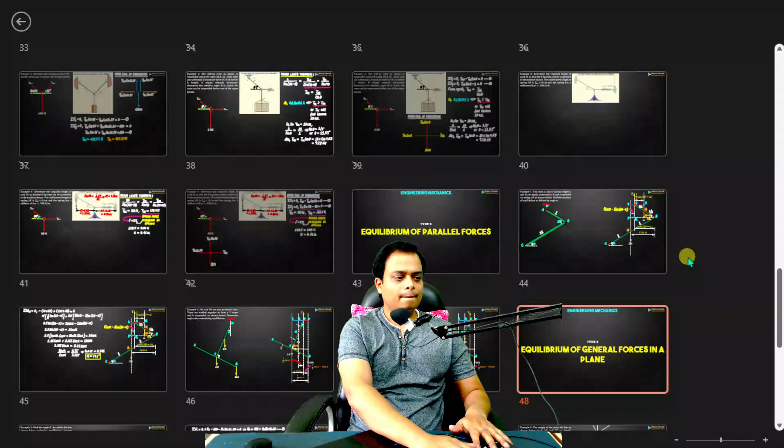All set? Here we go.

Today's session is going to be all about discussing problems that have appeared in Indian universities in the last decade or so. This is going to be very important for you if you happen to be a first year engineering student and if you have this course of engineering mechanics. So, welcome to the world of statics. And today we'll be discussing problems based on general case of forces in a plane.

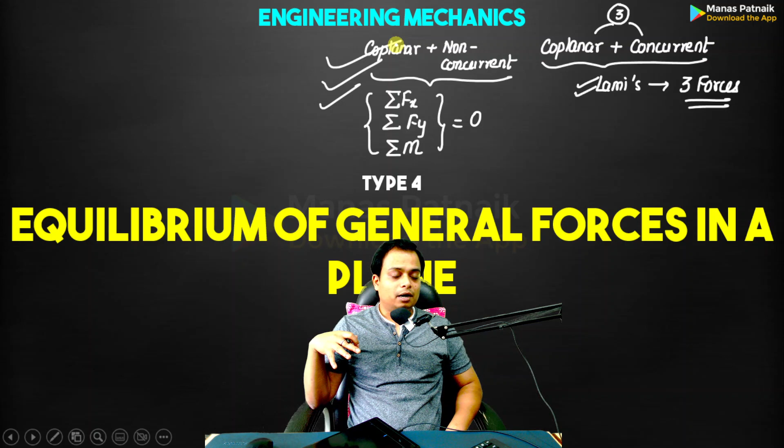So it is my responsibility today to explain and demonstrate how all of these things can be applied in the best possible way. What you need to know is how to create free body diagrams, and even that I'll be explaining in detail. So here we go with problem number 1. Watch this. This is going to be interesting. Take a look. Find the angle theta for which the bar shown below maintains equilibrium.

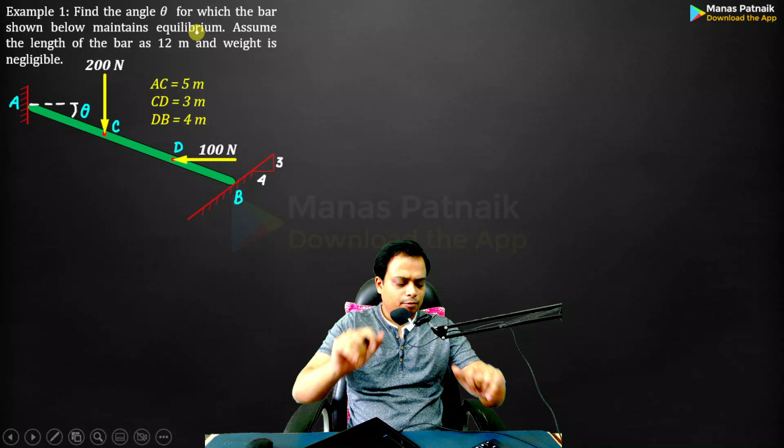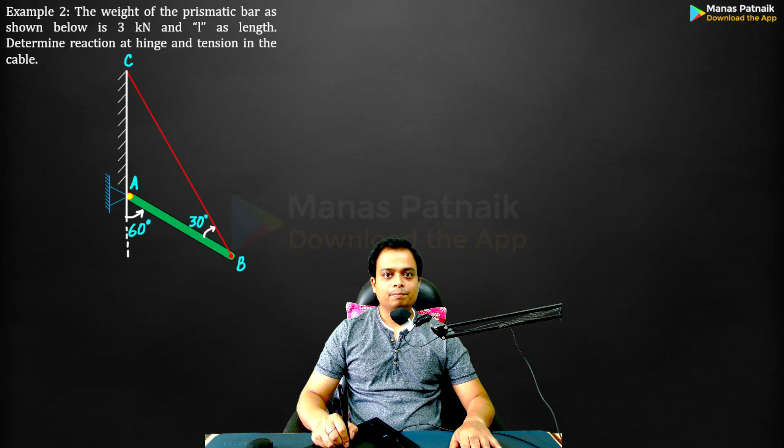And one sec, let me just show you the problems that we'll be discussing in today's session. This is problem number 1. Then we'll be discussing this problem over here. Take a look. Very interesting. And then we are going to take a look at this problem. All of these problems are such that we'll be applying the equations of equilibrium and we'll be trying to work out the value of unknown forces such as tension in this case. So watch this video right till the end. This is going to be very, very interesting.

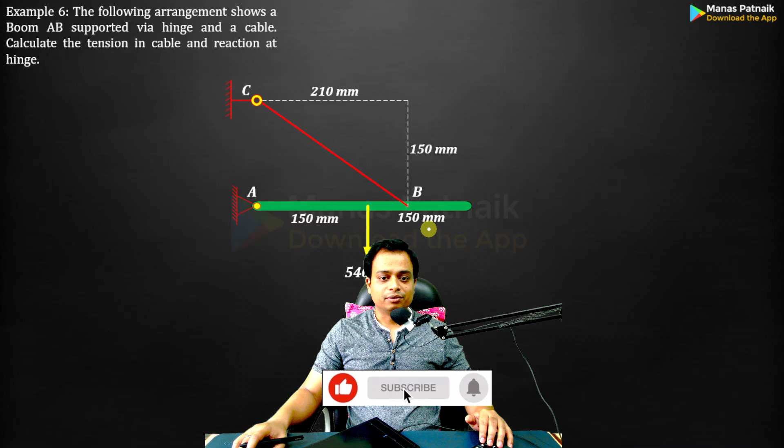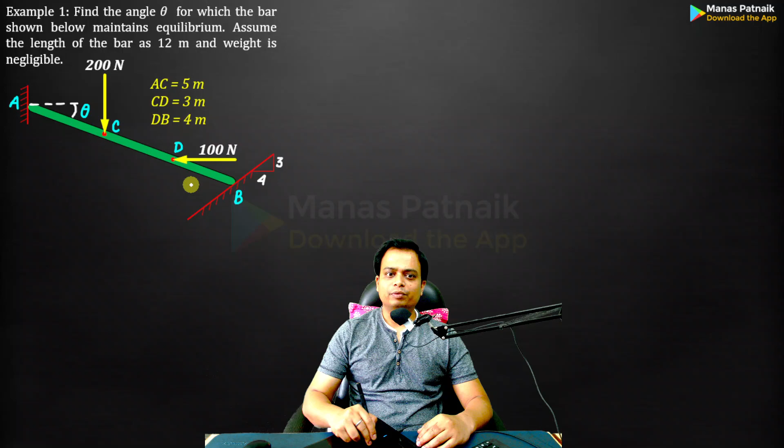Let me start with problem number 1. Take a look. Find the angle theta for which the bar shown below maintains equilibrium. Assume the length of the bar is 12 and weight is negligible. There is no weight. The length of the bar is 12. And if I can just zoom in, all of these segments of the bar, like AC, its length has been given to us. CD is 3, DB happens to be 4. So all the dimensions have been given.

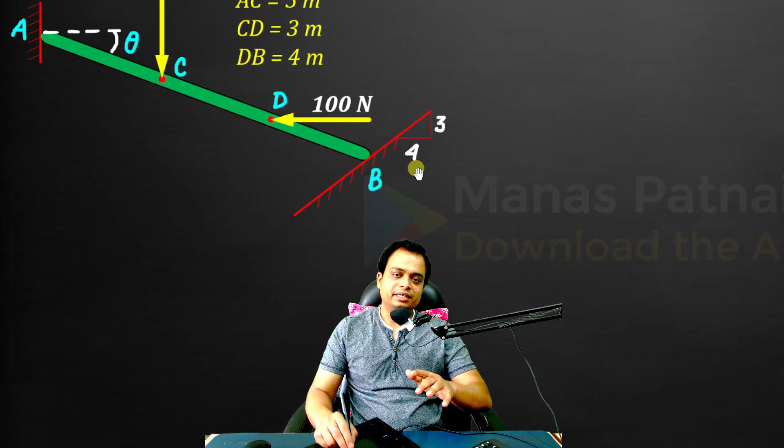Even this inclined surface over here, the angle of the incline is something that you can work out with the help of this triangle. So tan theta is equal to 3/4. Just do the inverse, you'll get the angle. It's very simple. Now let me start by making the free body diagram. Here it is. These are all my reference lines. Nothing fancy. The first thing, students, that you can do, you can simply take a look at this triangle.

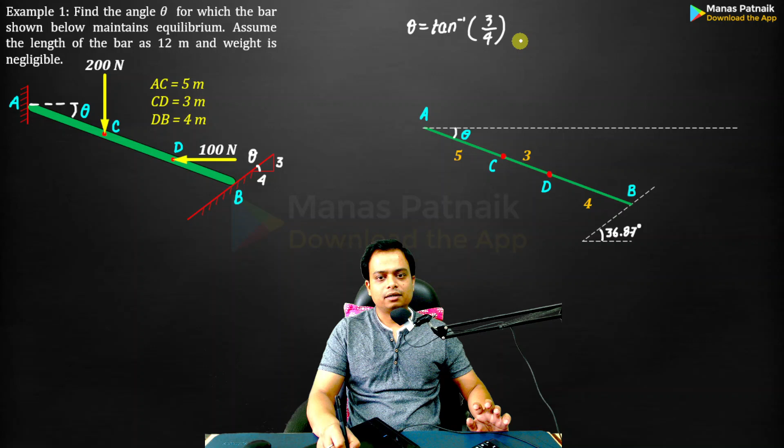If I say that this angle is theta, let me zoom in again. If this angle is theta, tan theta will be equal to 3/4. That means theta will be tan inverse 3/4. And the value of theta you will get over here is 36.87. Theta equals tan inverse 3/4. Done. This is the result that I have written. If this angle is theta, then this angle also is going to be theta.

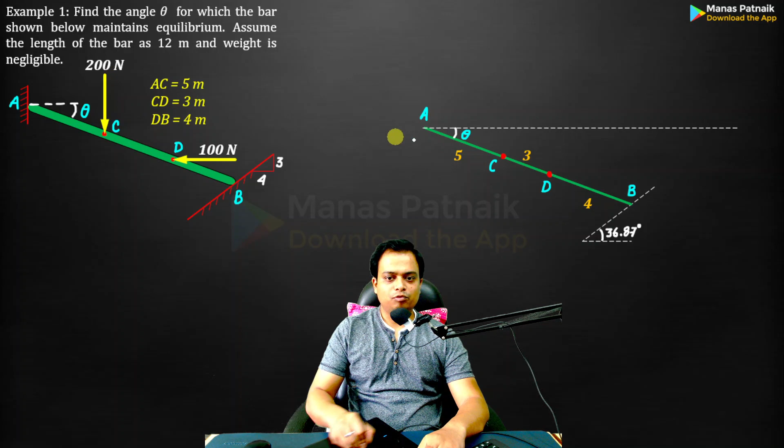Now you know the math. Secondly, there is this 200 Newton force over here. Then you've got 100 Newton force horizontal towards the left hand side over here. Done. All forces? No. If you remove these supports, then only you are making the free body diagram.

So perpendicular or normal to the surface, you'll have a reaction at A. Normal to the surface, you'll have a reaction at B this way. Okay, so if it is making an angle of 36 degrees approximately over here, then if this happens to be the normal, and if this is the vertical, the angle between normal and vertical will also be 36 degrees, 36.87 to be very precise. Simple concepts that we had discussed in the previous session.

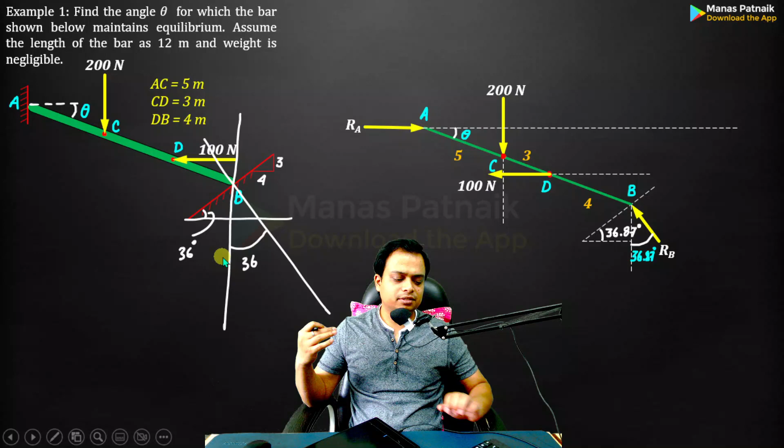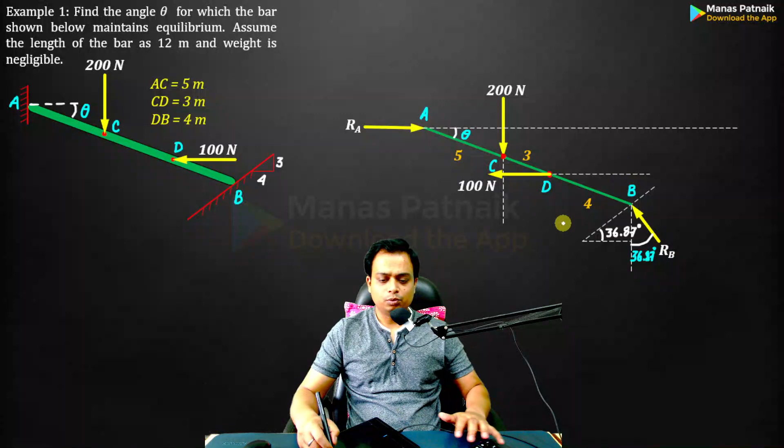Okay, watch this. This is going to be very, very interesting. Now comes the point where I'll be simply resolving the force of RB into components. So if you watch, we zoom in slightly. If you watch, this RB can be resolved into RB cos 36.87 and RB sine 36.87, isn't it? Yes, sir, we can do that. So do it. Here we go. RB cos and RB sine.

Done. Now comes the time where we'll be applying the equations of equilibrium. You can apply the equations of equilibrium anytime. Okay. Fx = 0, Fy = 0, moment = 0. Right? So if you are slightly not confident with Lami's theorem, go ahead and use this technique. This is going to be very helpful.

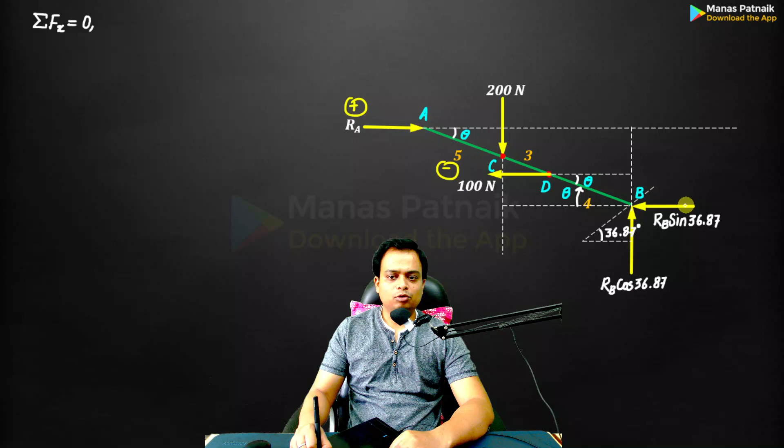Now let's start with summation Fx = 0. So sir, there is this Ra which is to the right. So take it as positive. Okay, sir. 100 is to the left. Take it as negative. Okay, sir. RB sine 36.87. This is also to the left, sir. So take it as negative again. Okay. So let me write them. Plus Ra minus 100 minus RB sine 36.87. So this is our equation number 1.

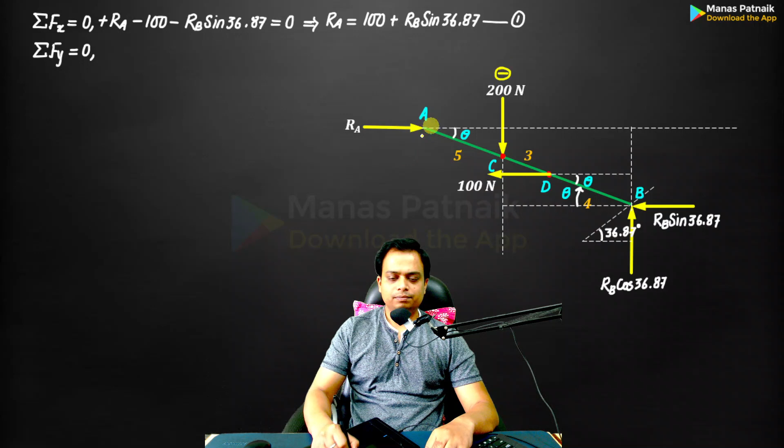Okay. And you can see that there is one equation and two unknowns. Ra and RB are the unknowns. We cannot proceed. Now let's apply another equation. This is summation Fy equals to 0. If you watch carefully, this 200 Newton is downwards, negative. This is upwards, positive. These are the only two forces in the y direction. One of them is positive while the other is negative. You simply write negative 200 plus RB cos 36.87.

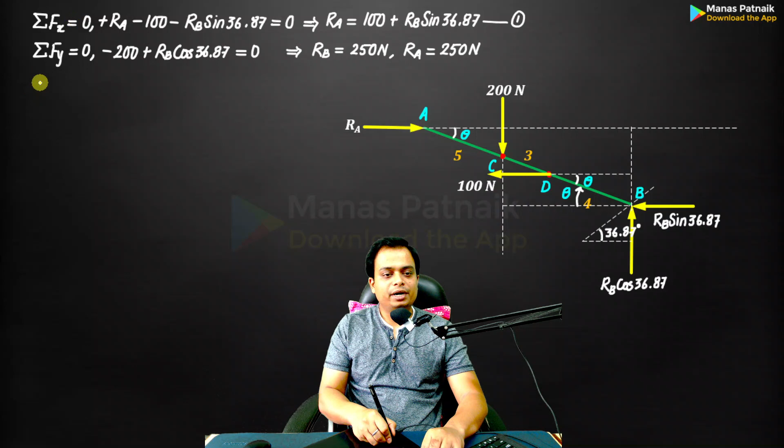Done. Solve for RB. This is what you get. Very simple. And once you have the value of RB as 250, you can put it over here and get the value of Ra. Simple math. Now, so what shall we do? Now you should go for the last equation of equilibrium, called the moment equation equal to 0. Now, which point shall I take the moment about? Should I choose A? Should I choose C? Should I choose D or B?

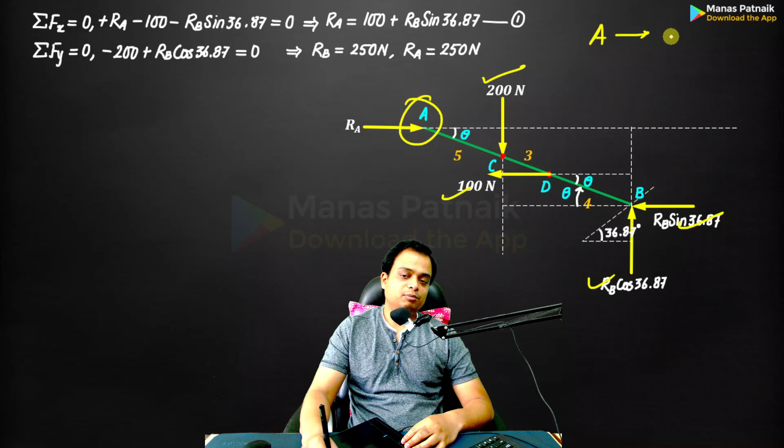First of all, let me start with point A. If you take the moment about point A, you don't have to worry about Ra because Ra is actually passing through A, and hence you cannot drop a perpendicular on it. Its moment is going to be 0. When you take the moment about A, you have to deal with 1, 2, 3 and 4 forces. Right. This is a small practice that you should always do before choosing the point for moment. Okay, so A has got 4.

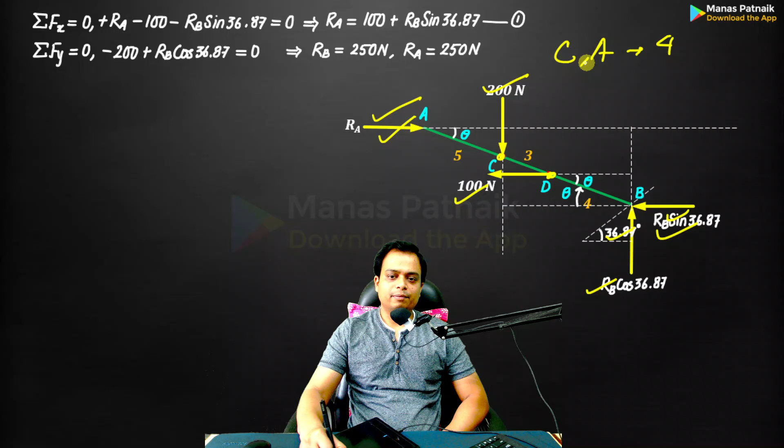If you choose the moment about C, again 200 Newton force is out of the picture, you have to deal with 1, 2, 3 and 4. So C also has 4 forces. What about D? If you talk about D, this 100 Newton force is out of the picture, but you have Ra and 200. You also have RB cos. You also have RB sine. Again, D also falls in the same category where you have to deal with as many as 4 forces.

Okay, but when you take the moment about B, these 2 forces are out of the picture because they pass through B. You can't drop a perpendicular on them, therefore their moments are 0. And here you are left with only 3 forces, 100, 200 and this Ra. So the best option that we have is point B, and we are going to take the moment about point B equal to 0. How to take the moments? This is something I have found students confused about.

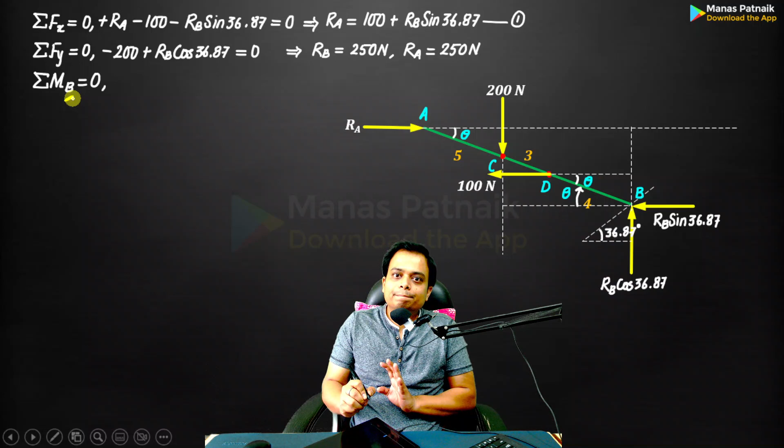Okay, so whenever you want to take the moment, you always should draw the line of action of the force and then drop the perpendicular from the respective point. The point in this case is point B. Let's say we want to take the moment of 100 Newton force. Just watch.

So this is going to be the line of action of 100 Newton force. From where are you taking the moment? Sir, we are taking the moment about point B. Watch this, this is very interesting. So drop a perpendicular from B. This is the perpendicular. So you know this force, this force is 100. What about this perpendicular distance? Do you know this distance? We still don't know the distance, but we can work it out. Yes, you can work it out. So that's the first thing.

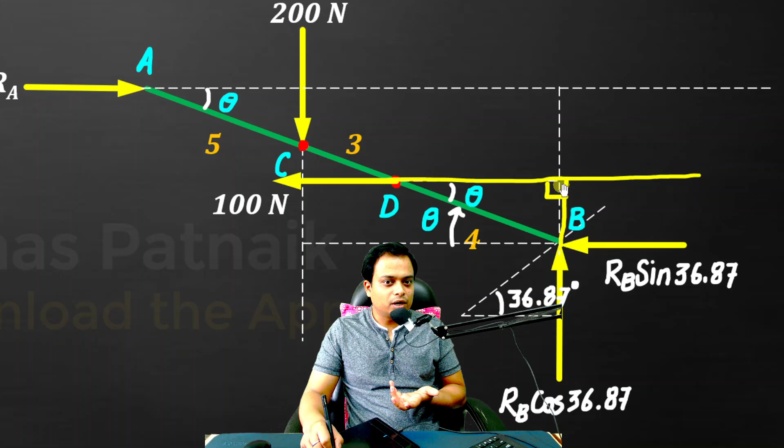Okay. Secondly, let me erase this. What about this 200 Newton force? So this is the force. This is the line of action of 200 Newton force. We are taking moment about B. This is going to be the perpendicular distance. It is this distance that you now need to calculate.

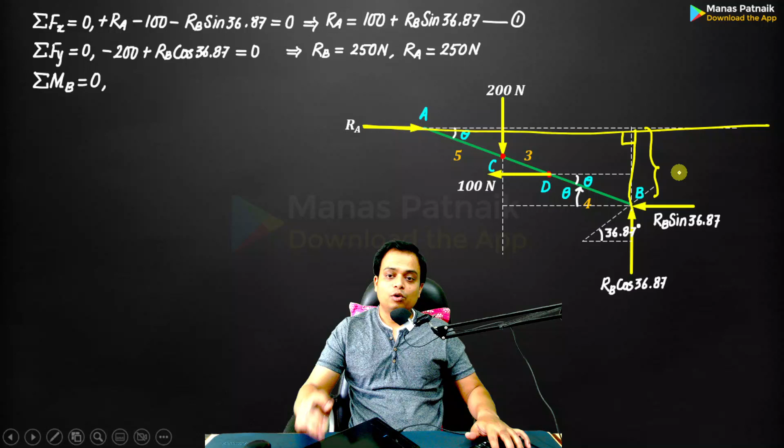And finally, there is one more force, that is this RA. This is the line of action of RA and perpendicular drop from B. This is the perpendicular distance. How much is this distance? Well, all of these distances can be calculated. You don't have to worry, I'll demonstrate it to you. Watch. A very interesting case indeed. Take a look. Let me zoom in.

And what color shall I use? Just a second. Orange.

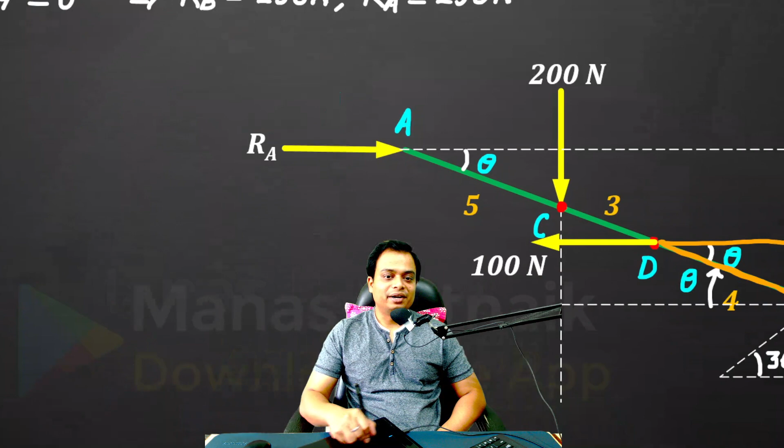Take a look at this triangle. It is a right angle triangle. Agreed? Yes, sir. In this right angle triangle, we know this theta. Okay, we don't know this theta. It is this theta that we are actually calculating, right? Anyways, let me go ahead.

What is this distance? Sir, this is DB. What is the length? Sir, this is 4. If this is 4 and this is theta, this is going to be 4 cos theta. This is going to be 4 sin theta, right? The side in front of the angle is the sine component. Along it is the cos component. Again, this is 4, which is the hypotenuse, and this is 4 cos theta. This is 4 sin theta.

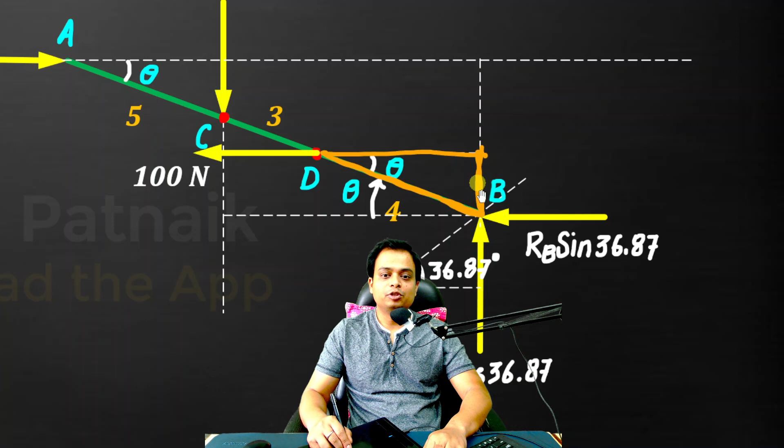We need this distance so that 100 multiplied by this perpendicular distance will give you the moment of this force. So this is going to be 4 sin theta. That's done. The second distance that I am really interested in is this one. This is the force, and this is going to be the perpendicular distance. Sir, how can we work this out? Let me just demonstrate. Take a look at this triangle and then I'll zoom in.

We just want to calculate theta for equilibrium conditions, just to ensure that the bar AB stays at rest. Take a look now. Oh, why did I erase? I had to zoom in. Take a look.

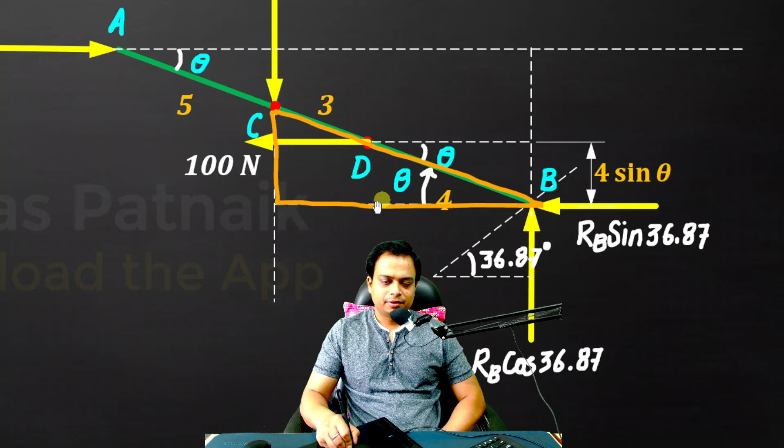So from C to B, that means 3 plus 4. This hypotenuse is 7. If this is 7 and this is theta, then this has got to be 7 cos theta and this has got to be 7 sin theta. Mark it. This is 7 cos theta. I'm marking the perpendicular distances for the forces. First of all, I did for 100, which was 4 sin theta. Now I have done for 200, which is 7 cos theta.

And finally, I have to deal with this RA. If this is the force RA, then the perpendicular drop from B is there. Let me make this triangle. This is the perpendicular distance, right? Let us now take a look at this triangle. Watch. So this is theta. Agreed. How much is this?

So 5 plus 3 plus 4. How much? 12. So if this is 12 and this is theta, this is going to be 12 sin theta. This is 12 cos theta. And you need this 12 sin theta. Done. So forces and the corresponding perpendicular distances with respect to point B have been worked out. Now you simply need to write the moment equation. This is going to be fun.

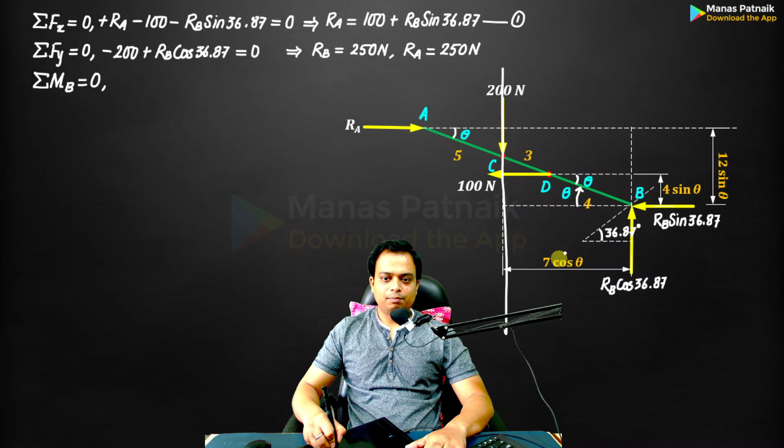Watch. Let me choose first of all 200. 200 multiplied by what? No, I have chosen 100. Okay.

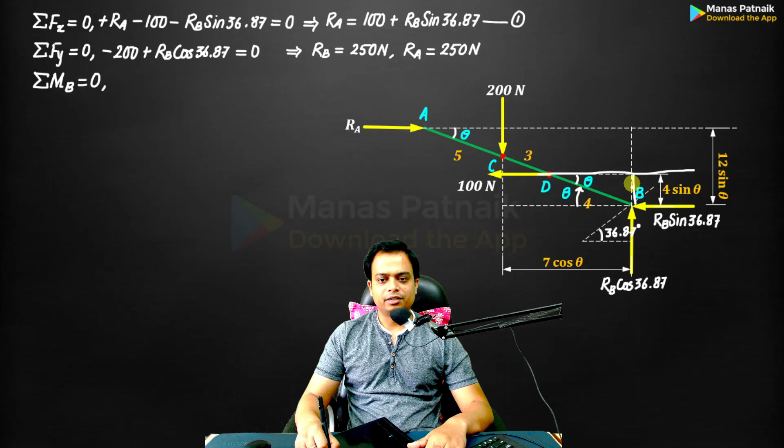Whichever order you go, don't worry. This is the 100 Newton force. Yes, sir. This is the perpendicular distance. So basically what you have is 100 multiplied by 4 sin theta. Anti-clockwise with respect to point B, so positive sign. 100 into 4 sin theta.

Okay, sir. Now you have another force of 200 Newton. So this 200 Newton force, and this is the perpendicular dropped. Okay, so 200 multiplied by 7 cos theta. Again, anti-clockwise, positive. Done. Very easy. Finally, you've got this RA. So this RA multiplied by the perpendicular distance, again, this is 12 sin theta. So clockwise, therefore negative. And RA's value we know is 250. We have got it from the previous equilibrium condition.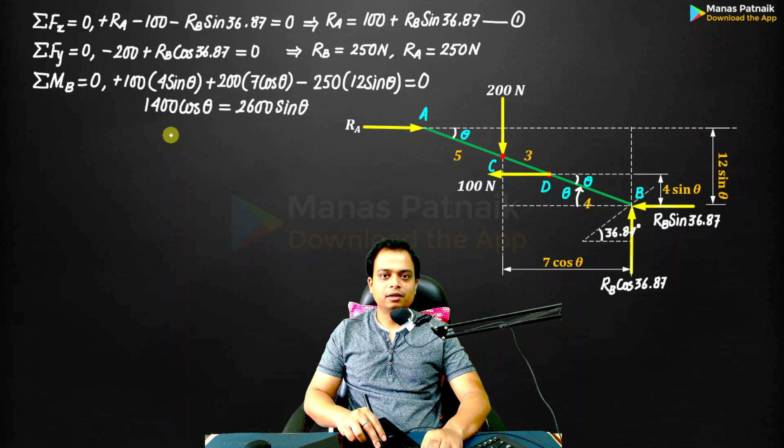Now, students, what you need to do is have all the sin thetas on one side of the equal to sign, while cos thetas on the other side. This is how you need to make the arrangement. Just take cos theta over here, 2600 over here. So you'll have an equation in tan theta, which is going to be equal to 7 over 13. Go for the inverse, go for the kill, and this is what you get.

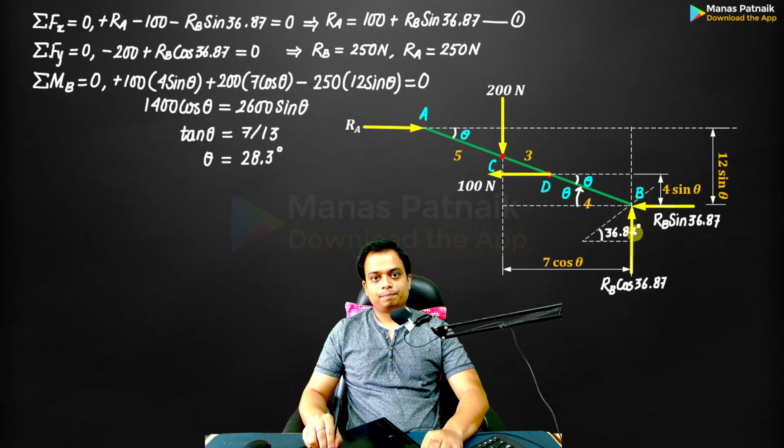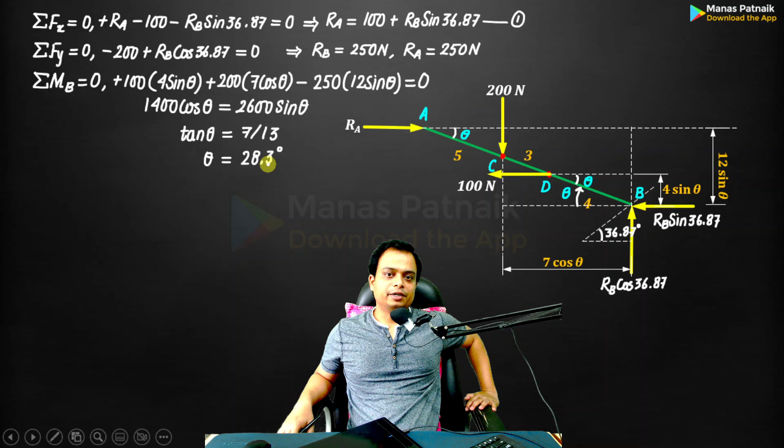So if you keep this bar at an angle of 28.3 degrees, where 200 Newton force, 100 Newton force, and there are these supports, one of which is absolutely vertical while the other is inclined, if you keep this bar at this very angle, it is going to stay in equilibrium forever. Right? I just hope that you've got this entire problem and its explanation. Okay, now moving on to the next problem.

So take a look. We have some water. The weight of the prismatic bar, this green colored bar over here, is given as 3 kilonewton. The length is L. Determine reaction at the hinge and tension in the cable. For this very question, I'll be showing you two approaches. One approach is something that you can apply everywhere, that means equations of equilibrium: Fx, Fy and moment equal to 0 for all the forces. This is going to be our first approach.

In the second approach, I'll be talking about Lami's theorem, how you can apply Lami's theorem, right? Because whenever I see three forces, I always try to check whether we can apply Lami's theorem or not. And since the body is in equilibrium and three forces are acting on it, the lines of action of all of those forces must pass through a common point. This is the logic through which I'll be explaining the second approach. But first, we are going to keep it very simple. Let's apply the equations of equilibrium.

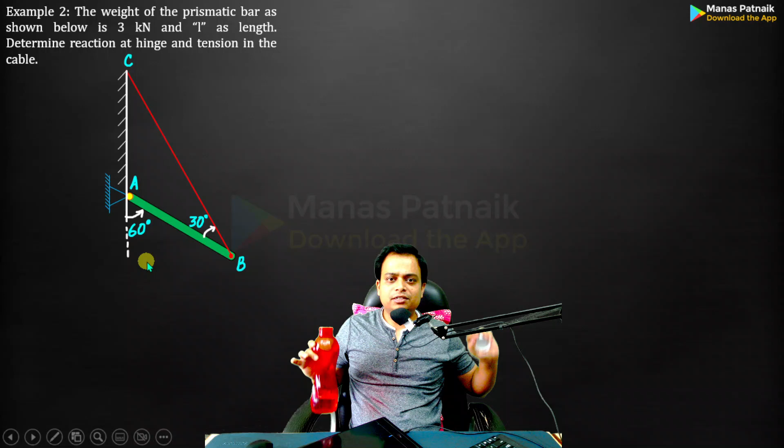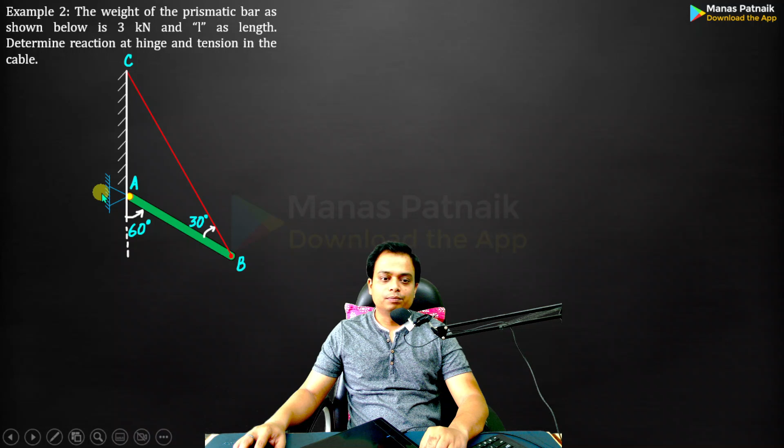Free body diagram of what? Sir, only the prismatic bar. So free this prismatic bar from this cable, from this vertical wall and from this support also. And if you remove this hinged support, you have to make a horizontal and vertical component. And by the way, the weight of the prismatic bar is given. Where are you going to put this weight? Sir, we are going to put the weight right at the center. Weight acts at the center.

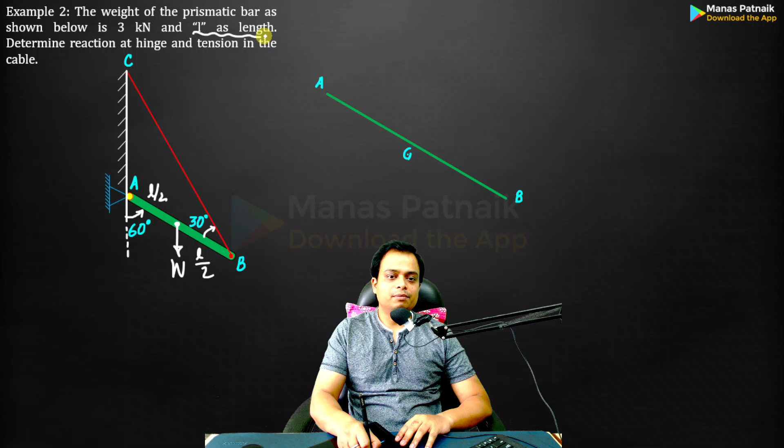And this distance to the left of the center is L by 2, and to the right of the center, again, the distance is L by 2, because the length of the bar happens to be L simply. Right? And this is exactly what I'll do. Here it is. Secondly, sir, when you remove this hinged support, it has to be replaced with appropriate reactions, horizontal and vertical at A, AX, AY.

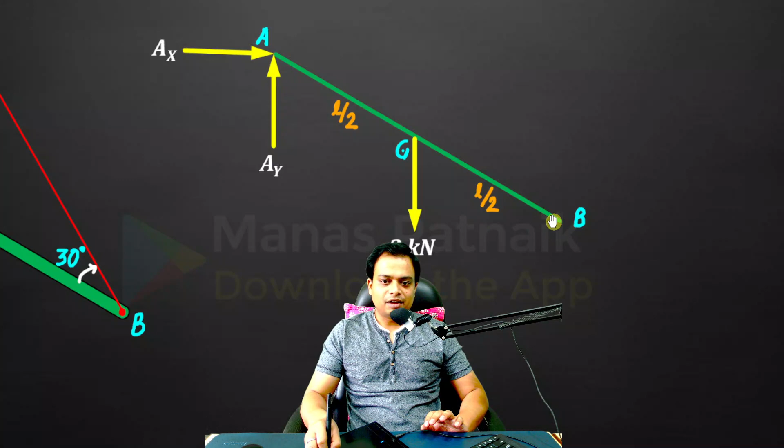Done, sir. And thirdly, you have this tension, making an angle of 30 degrees with this bar. So here we'll have the tension. Here it is. Okay, and this angle also has been given to us, by the way. This is 60 degrees with the vertical. If this is 60, then students, you know what?

This is 90. This is 90, 60 is 150. And this has to be 30. So this is 30. That is why I've written 30 over here. Simple math. I'm sure you can work it out. Okay. Now start by applying the equilibrium condition.

I'll be taking moment about A, because when I take the moment about A, these two forces are out of the picture and I am only left with this 3 kilonewton force and this tension T. Now to take the moments, the best approach is to resolve T into components. Let me demonstrate. If you want to resolve T into components, this is how you need to do it. This is the cos component of T.

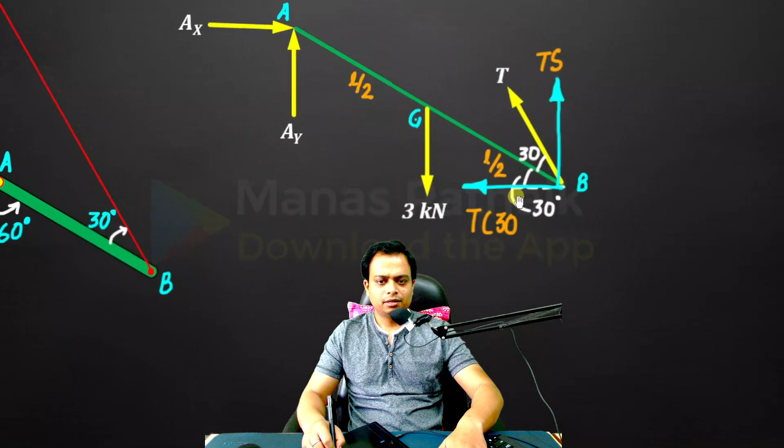Let me just write T cos 30, and this over here is going to be the sine component of the tension. So let me just write T sin. Oh, just a second. Did I do something wrong? This T is making an angle of 60 degrees with the horizontal. If this is 60 degrees, this has got to be T cos 60. Let me make this correction.

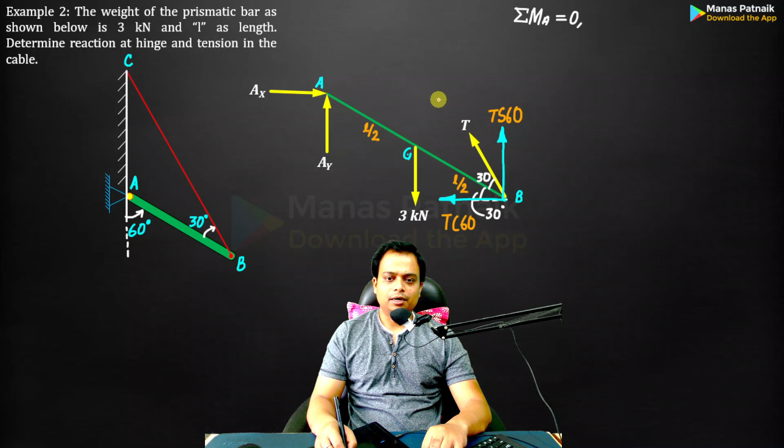And this is T sin 60. Okay. If you took this angle, then this would have been T cos 30 and this would have been T sin 30. That would have also been correct. No issues. Right? Okay, sir. Let's apply the moment equation. So where shall I start? Let me start with T cos 60.

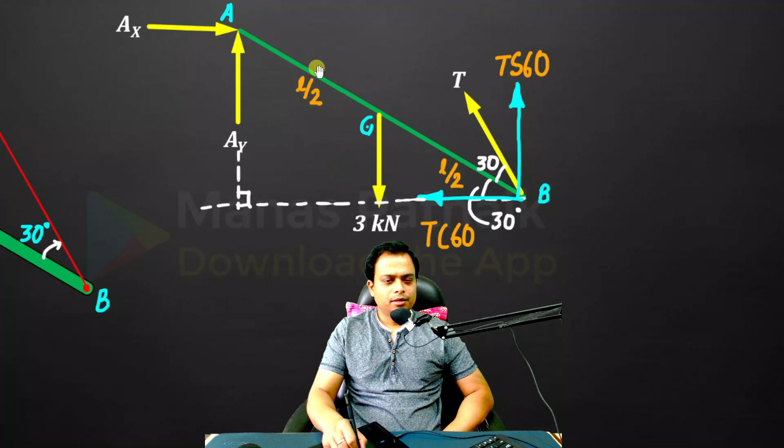So if you watch, this is the line of action of T cos 60 and this is the perpendicular drop from A. Can you tell how much this perpendicular distance is? Yes, sir, that's very easy. If you watch carefully, this triangle AB, and what is this point? Let me make it as O. Okay. So if you zoom into this triangle, right angle triangle AOB, this is the hypotenuse, which is L.

This is L. How much is this angle? Sir, this angle is 30 degrees. So this is going to be L cos 30 and this is going to be L sin 30. Understood? Okay. So T cos 60 into L sin 30. Can I do this?

L sin 30. Secondly, sir, you've got this component of T sin 60. This is the line of action of T sin 60. And if I can just drop a perpendicular, this is going to be that perpendicular. And this is O. Let's say this is M. Okay. Let me write M somewhere else. Okay, so now take a look.

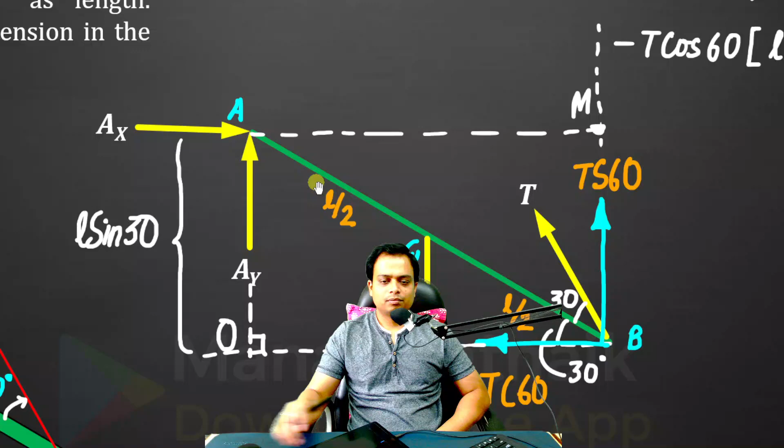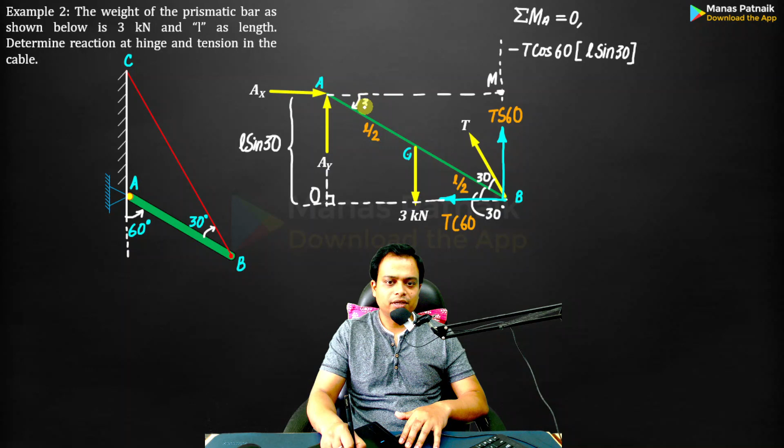So what is this angle? Sir, this angle is 30 degrees. Agreed. So if this is 30, this also has got to be 30. So I can write 30 degrees over here. So if this is 30, watch. This is going to be L cos 30 and this is going to be L sin 30. It is this L cos 30 that we are interested in. Okay. L cos 30.

Now watch. Let me zoom in again. So about point A, here it is. T sin 60 multiplied by perpendicular distance from A. T sin 60 multiplied by L cos 30. This is what you need to do. So it is anti-clockwise and that's why positive. Okay, you can see this.

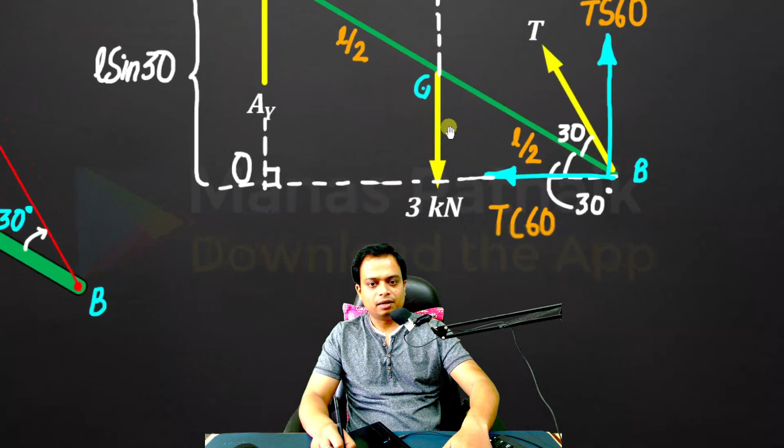Now we are only left with this 3 kilonewton force and this is also fairly simple. Watch, this is the line of action of 3 kilonewton force. Let me make this a bit more clearly. And this is the perpendicular drop from A. Okay, this is O, M, and let's say this is N. Now take a look at this triangle. Triangle AGN. Can you see this?

In this triangle, you've got this hypotenuse as L by 2. If this is L by 2, this is going to be L by 2 cos 30. This is going to be L by 2 sin 30. Very simple. Okay, we are taking moments about A. So what you really need is this one. This is the force and this is the perpendicular distance. This is going to be L by 2 cos 30. Let me write this. This is L by 2 cos 30.

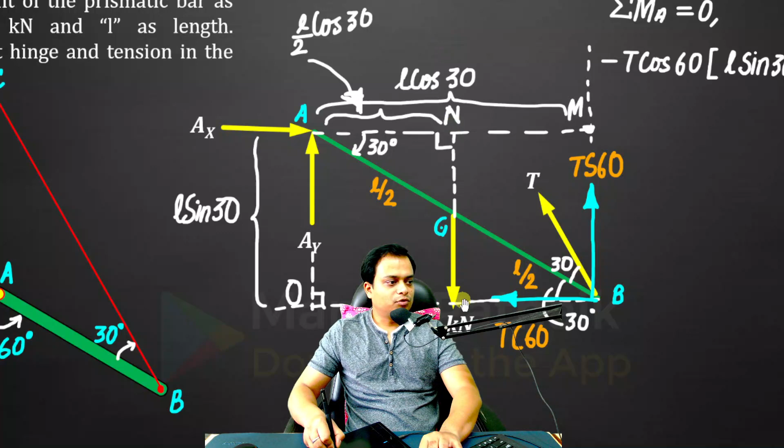So it's very simple. 3 kilonewton force multiplied by perpendicular distance. Let me zoom in. This 3 kilonewton force multiplied by this perpendicular distance, that is L by 2 cos 30, and here it is. Okay, very simple, clockwise. That's why a negative sign.

Now you can cancel the L's one at a time. Okay. And what you're left with is this tension. Now, if you take T as common, you see sin 60 cos 30 minus cos 60 sin 30. Let me take T as common and shift this to the right. So 3 by 2 cos 30.

You've seen this before: sin A cos B minus cos A sin B equals sin of A minus B. When you do that, what you have is simply this, and this is going to be sin 30.

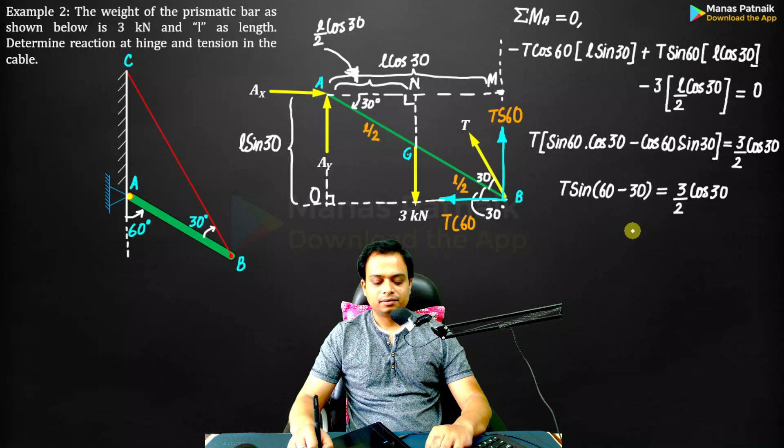Now you can simply plug in the value of sin 30 and cos 30 and solve for T. What you get is 2.6 kilonewtons. So yes, the approach seems a bit too long, but once you have framed the moment equation, it is just about mathematics.

So that's how you can calculate tension T. Now you can also go ahead and calculate the value of the reaction, the overall reaction at A. Let me just briefly explain this to you.

Summation Fx equals 0. Now you have to deal with Ax positive and T cos 60 negative. Any other force? No. So simply write plus Ax minus T cos 60. Solve for Ax. You already have the value of T, which is 2.6. Keep it over here and solve for Ax.

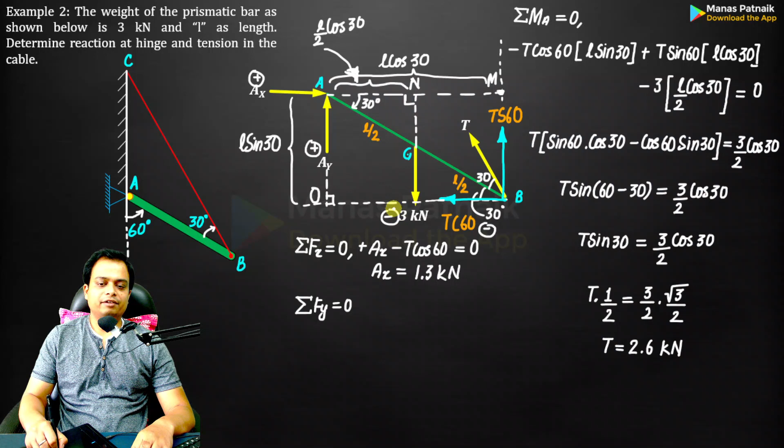Then you've got summation Fy equals 0. This is upwards, positive. This is downwards, 3 kilonewton negative. And this is upwards, positive again. So: plus Ay minus 3 plus T sine 60.

Again, put the value of T, 2.6 kilonewton, over here, and then simply solve for Ay. What you have is 0.75.

So you've got these horizontal and vertical components. If you want to find the net force at A, or the resultant at A, what you need to do is use this formula: root over Ax square plus Ay square. Just plug in the values 1.3 and 0.75. This is what you get.

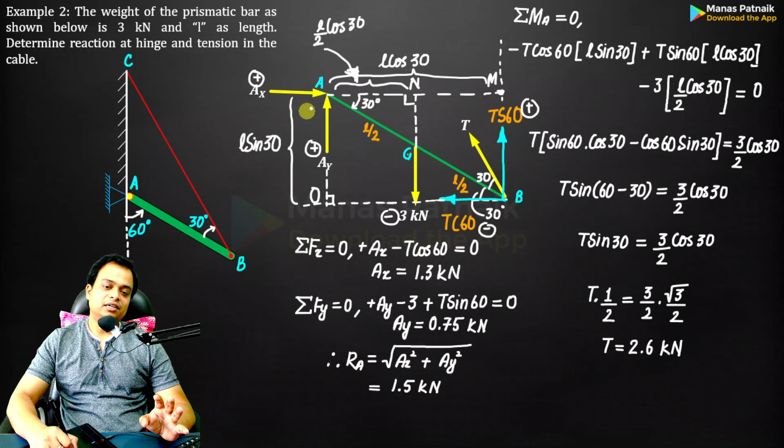You can even calculate the angle that the resultant is going to make with the horizontal. All of these things are possible. So this is what our answer is, using the equations of equilibrium.

Now, some of you must be thinking, okay, this was approach one, and as far as we can see, we had to deal with a lot of mathematics. If you are someone who does not like math a lot, you can use approach two, which I'm just about to explain. Let me make the free body once again.

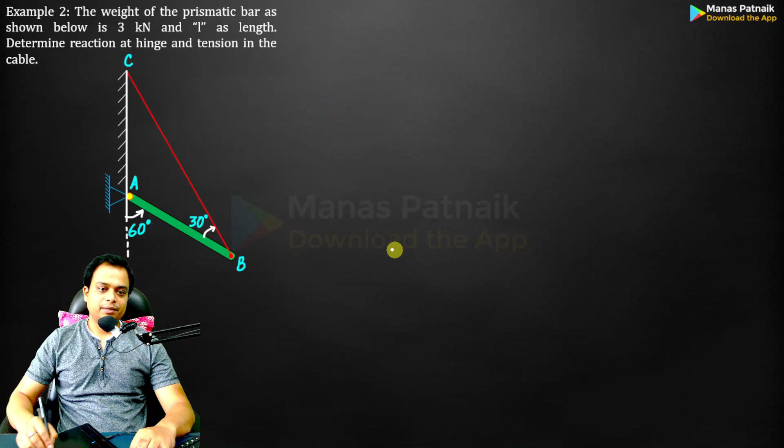Here it is: this 3 kilonewton weight right at the center, and then the tension over here, and the line of action. Please note that I am actually making the lines of action as well. How many forces are acting? There is this tension T acting, and the weight of the bar is also taken into consideration.

And so we know that there are going to be one horizontal and one vertical component, but the resultant is going to be there, somewhere along this direction. So the idea is very simple.

If there are 3 forces acting on a body and the body is in equilibrium, listen to this: then the lines of action of all of the forces should pass through a common point. This is the basic rule for 3-force equilibrium. If a body is in equilibrium under 3 forces, then all 3 forces — 1, 2, and the third one through A — must pass through this common point.

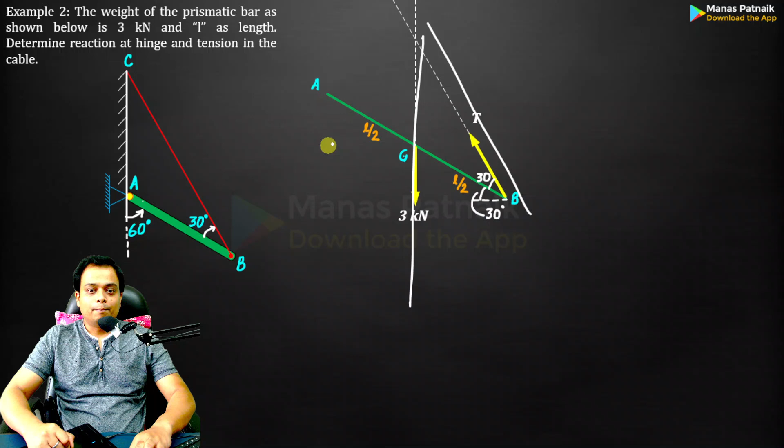Let me show this to you in one go. Here it is — all of them have to pass through one common point. Now this is valid for only 3 forces. If there are more than 3 forces, don't even think of applying such a technique.

All right, I saw 3 forces and I thought about using Lami's theorem, but there are a lot of angles and their calculations, and you've got to be good with geometry. This is something you've learned at school level. Do you remember isosceles triangles, equilateral triangles? All of those fundamentals are going to come in here.

Watch: this is the line of action of T, that's the 3 kilonewton line of action, then the line of action for the reaction at A has to pass through O. In the previous session, we have seen the components of RA in the form of Ax and Ay.

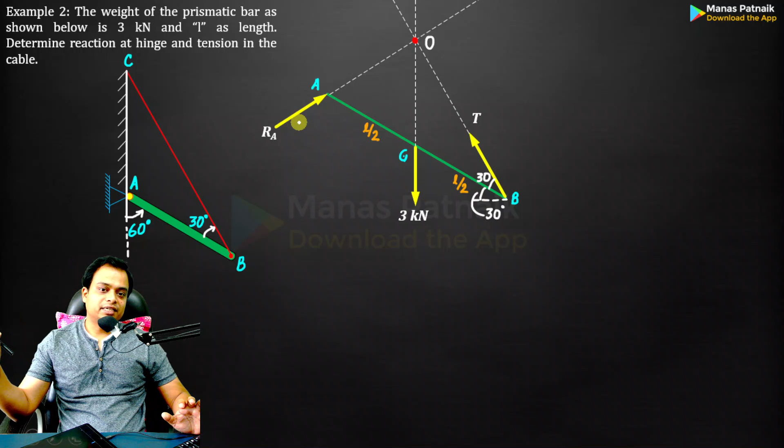We actually worked out these components and then plugged it into this formula, AX square plus AY square, to get the value of RA. This is what you got, right? Here we are going to do the exact reverse. How do you approach, sir?

So this angle 60, can you see this? Mark it. Okay, sir, this bar makes with the vertical, this is 60 degrees. So bar and vertical, this is 60 degrees. Now what? So if this is 60, these two lines are parallel.

And this is the transversal. If this is 60, then sir, this is also 60. Mark it. Let me erase 60 and this is 60. So sir, this is a straight line. This is 60. This is 120. Very simple.

If this is 120 and this is 30, 120 plus 30 is 150. Then this has to be 30. Yes, sir, sum of all the angles is 180 degrees. That's why 30 degrees. If you watch, these two angles are same.

Then the sides in front of them will also be same. So if this is L by 2, this also has to be L by 2. Now you know this is L by 2, isn't it? So this side is also L by 2.

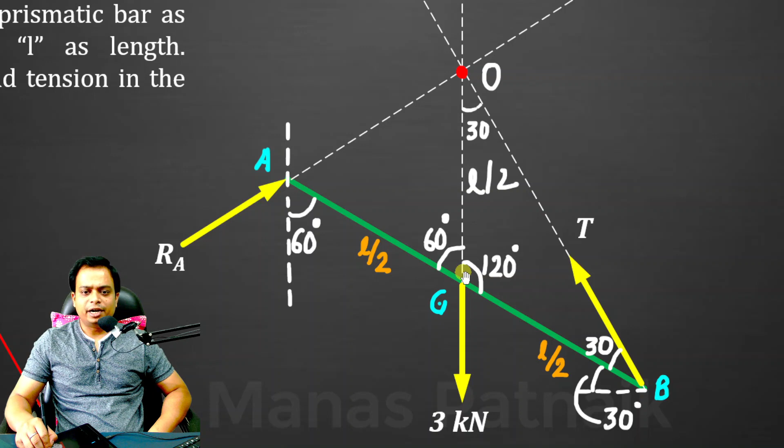Now watch, let me zoom in. Take a look. Since these two angles are same, if this side is L by 2, you can also claim that this also will be L by 2. If this is L by 2 and this is L by 2, these two sides are same, then the angles in front of them will also be same.

If that is the case, you can say this angle is x and this is x, so we can simply write x plus x plus 60 degrees will be equal to 180. So this is going to be 2x equals to 120, x equal to 60. That means these two angles will also work out as 60 degrees, isn't it?

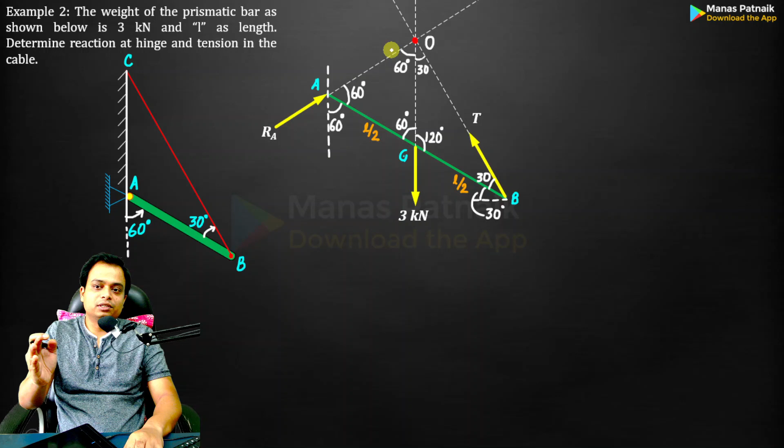So we had to go through a lot of calculation, because in order to apply Lami's theorem, what you need is the force diagram. So you need proper angles, the angles that these forces are making either with the horizontal or with the vertical. And let me put all of these forces in one single picture. Okay, here we go.

Let me put this 3 Newton over here, exactly here, 3 kilonewton by the way. Then you've got this tension T. Tension T, as you can see, is making an angle of 60 degrees with the horizontal. So you can mark it over here, 60 degrees with the horizontal.

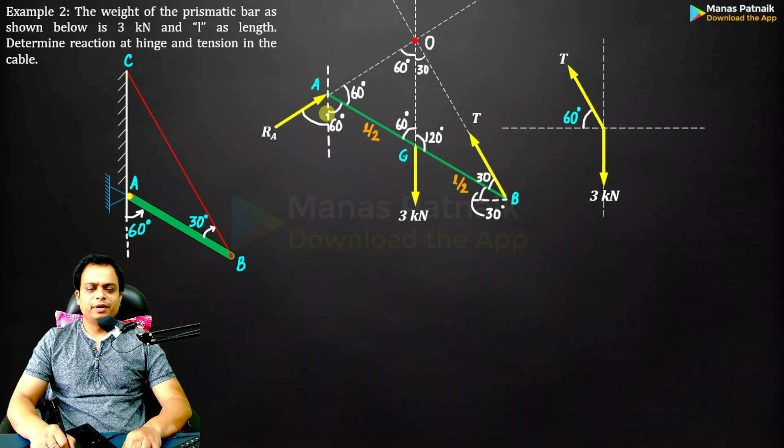And this resultant at A, or reaction at A, is making an angle. What is the angle that it makes with the vertical? You can see here, if I can shift this resultant, you can clearly see this angle over here is 60 degrees. So the resultant at A, RA, makes an angle of 60 degrees with the vertical.

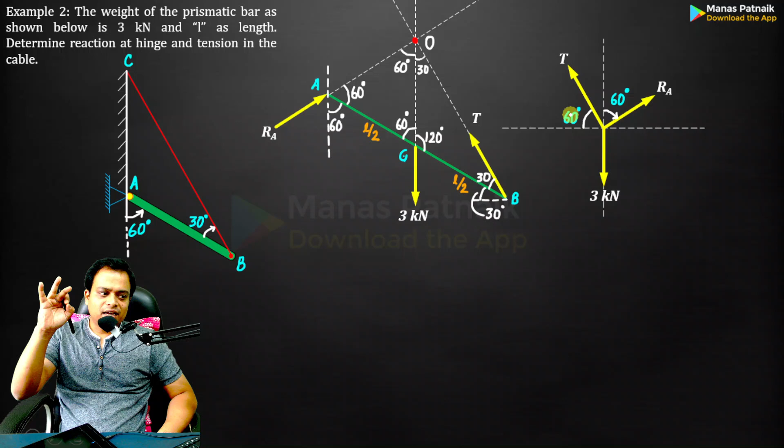That is exactly what I've done. Once you've got this diagram ready, you can very easily apply Lami's theorem, and find the unknowns. So you have unknowns in the form of T and RA. Let's go ahead and start with 3 kilonewton.

So these are the two forces remaining, and the sine of the angle between them has to be taken. So 3 kilonewton divided by sine of the angle between the remaining two forces. It's very simple. This over here is 30. So 30 plus 60, let me zoom in.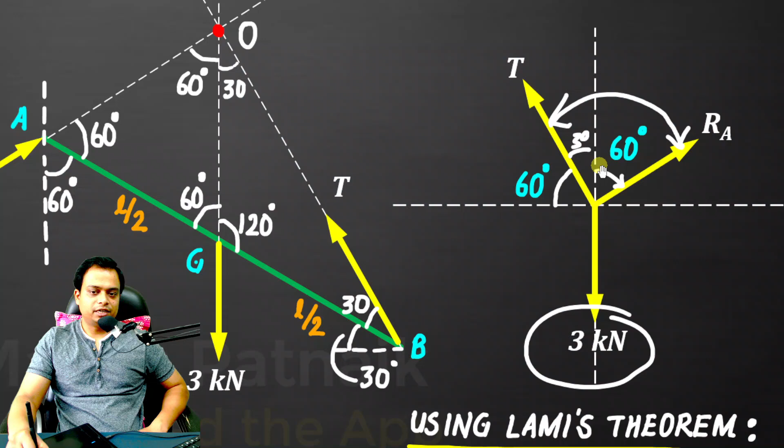If this is 60, this is 30, isn't it? 30 plus 60, that means 90 degrees by the way. This is 90 degrees. Secondly, if you pick T as your force, then this is the angle. So this is going to be very simple: sine of 180 minus 60.

Agreed? Yes, sir. And if you take RA, it is this angle that you need to work out. This is going to be simply 90 degrees, 90 plus 60. Done. Solve.

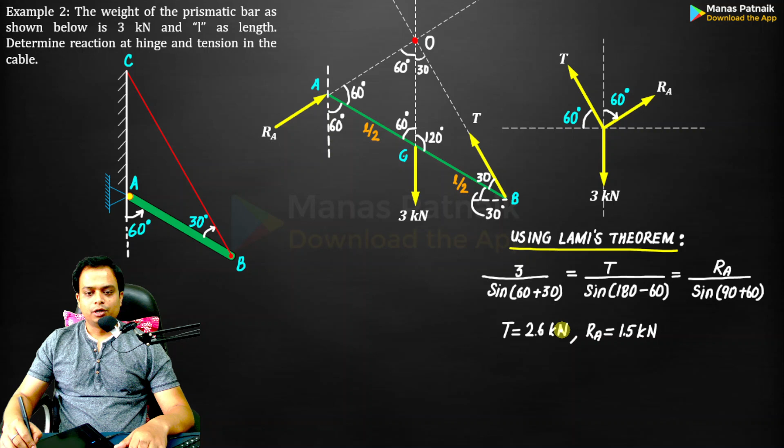This way, solve for RA and T. These are the values that you get: 2.6 kilonewton and 1.5 kilonewton. These are the same answers that we got by applying the equations of equilibrium. T equals 2.6 and R equals 1.5.

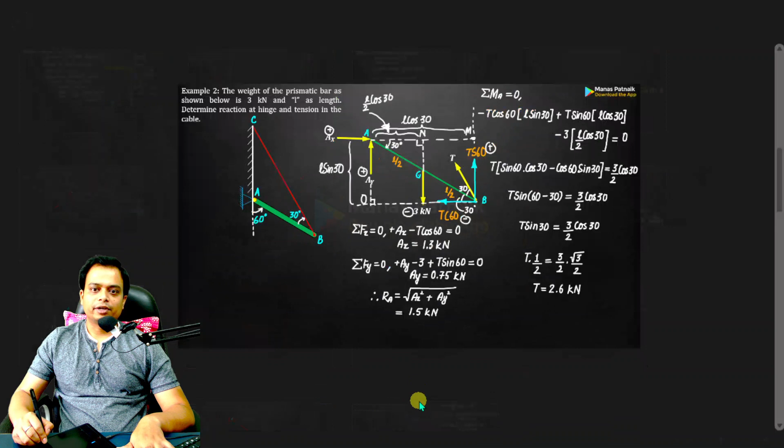You can make a check, right? Again, let me have some water.

This is going to be very interesting. Okay, and we'll be now discussing our final problem.

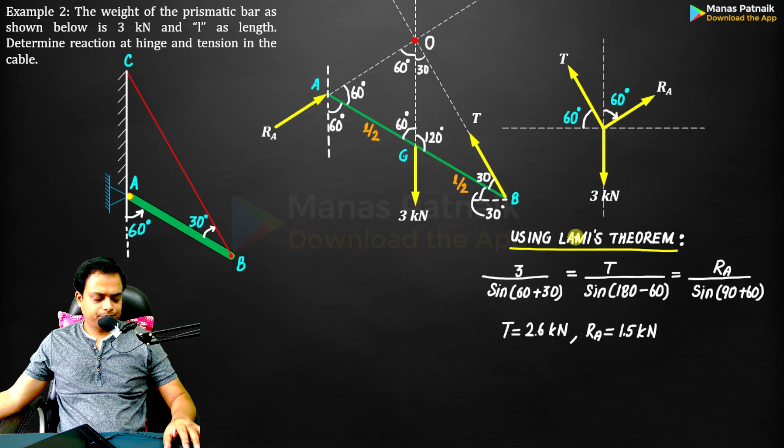What was the problem I thought of discussing? Slide 58. Okay, a very interesting one.

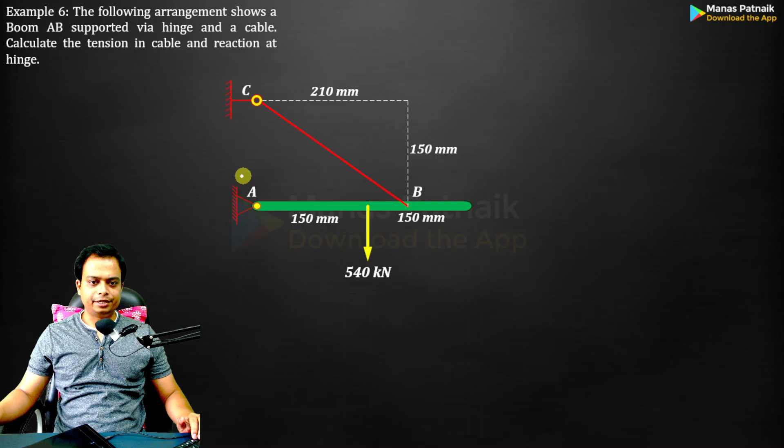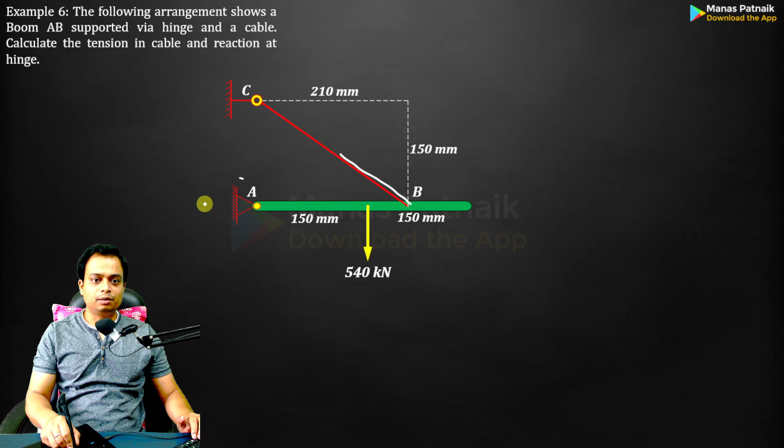So the following arrangement shows a boom AB supported by a hinge and a cable. This is a hinge and a cable over here. Calculate the tension in the cable and the reaction at the hinge. It is the tension in this cable that we need to work out, and we need to find the reaction at the hinge. Obviously, if you remove this support, you have to replace it with a horizontal and a vertical, that means AY and AX. And it is this resultant, the resultant of AX and AY, that we are very much interested in.

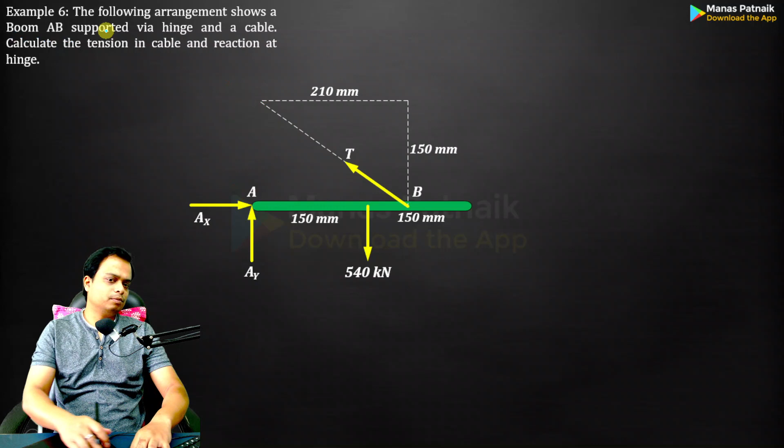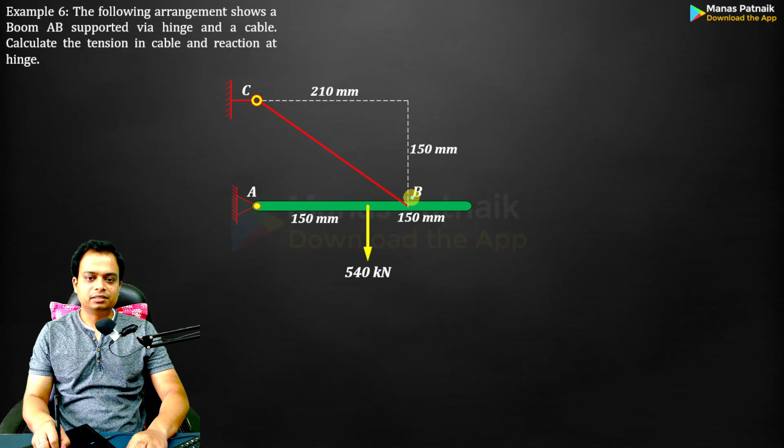Again, all of these things can be worked out. So let us start by making the free body diagram of the boom AB. And here we go, done. Watch, a hinge has to be replaced by a horizontal and vertical. There is this cable over here. We are interested only in this boom AB. So this is the tension. Done. And some distances have been given to us, and we are going to make very good use of it. Now take a look.

You can start with Fx=0, Fy=0, but it's better to start with the moment equal zero equation. Take a look, this is a triangle, two sides are given. You can simply apply tan theta equal to 210 over 150. That is exactly what I've done, and I've got the value of theta as 54.46.

Apply the moment equation. If you take the moment about A equal to 0, you have only two forces, 540 and T. T is unknown, that will be worked out. Take the moment about A equal to 0. Now T can be resolved into components, students. How? Let me just show this to you. T is going to have two components, one over here. Sir, what is this component?

This is going to be T cos 54. And another component is going to be over here, this is going to be T sine 54.46. Okay, just take a look.

Now AX and AY pass through point A, so zero moment. Even T sine 54 passes through A, again its moment also will be 0. So you are now left with T cos 54 multiplied by the perpendicular from A. So if you watch this T cos 54, let me zoom in. This is the force T cos 54 and this is the perpendicular distance AB. So AB is actually equal to 210 mm.

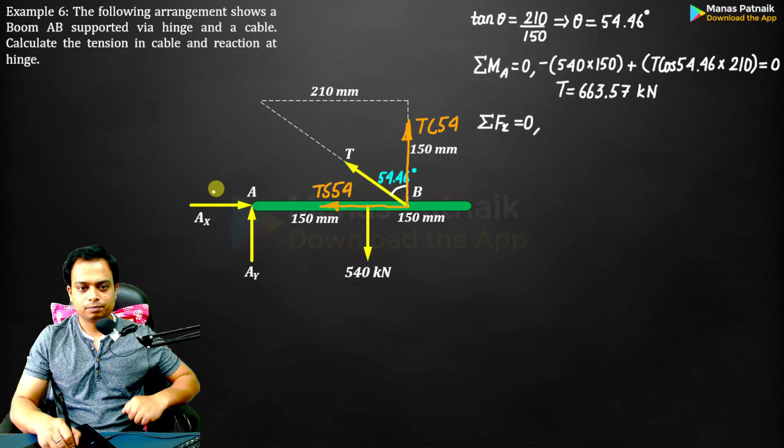Second thing that we'll do is summation of Fx equal to 0. Now you have to choose positive, negative. Is there any other force in the horizontal direction? I don't think so. Plus AX minus T sine 54.46. Simply put the value of T as 663 over here and get the value of AX.

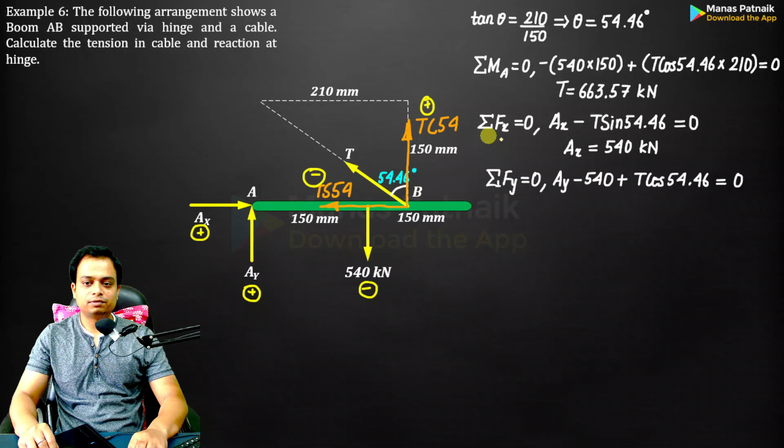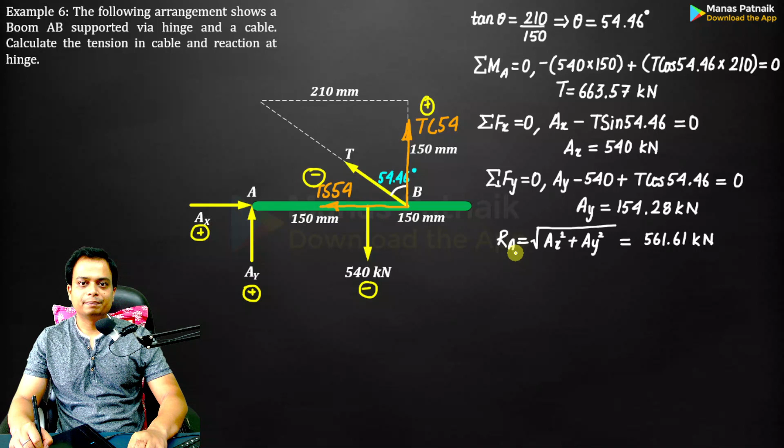Summation Fy equal to 0. Positive, negative, positive. Plus AY minus 540 plus T cos 54.46. Put the value of T as 663 over here and then solve for AY. This is what you get. Once you've got the value of AX and AY, you can also find RA. You know this technique, right? It's very, very simple. So we've got everything, we've got the tension, we have got the reaction. So it was fun, right?

So students, yes, that was all from my side for today.